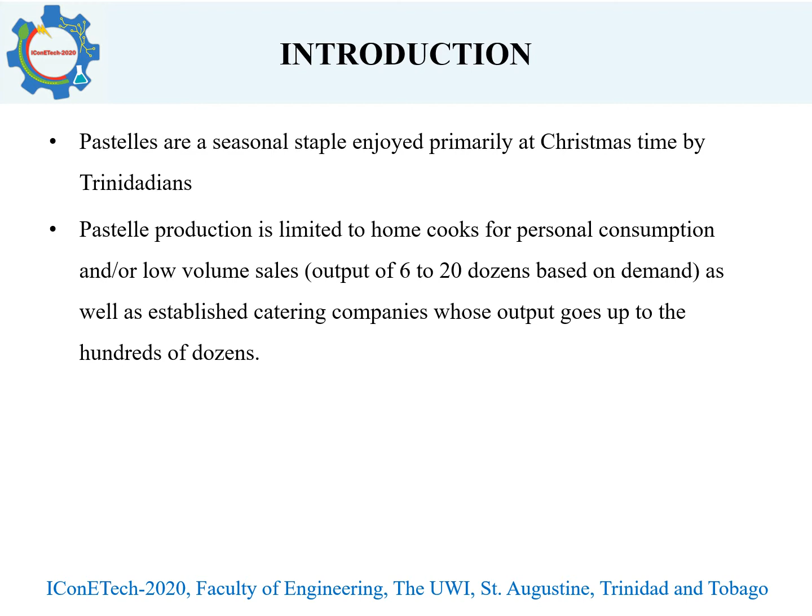Pastelles are produced either by home cooks for personal consumption or low volume sales ranging from 6 to 20 dozen, or by well established catering companies who can produce into the hundreds of dozens for large scale corporate events at Christmas time. In catering, as with all businesses, chefs are constantly looking for ways to increase their production outputs and increase profits by reducing their production time without compromising on quality of product.

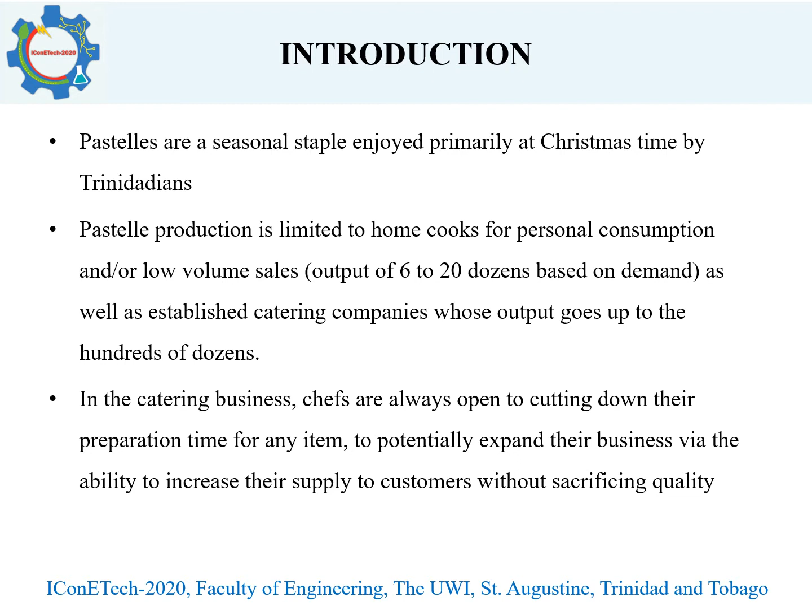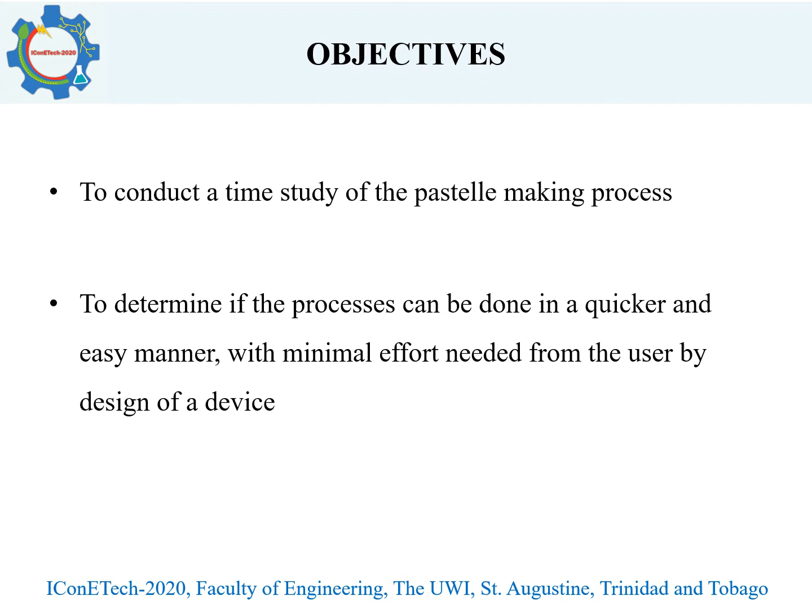Our objective was to conduct a time study of the pastelle making process with the assistance of local caterers and home cooks. For this project, we set out to determine if pastelles could be produced in a quicker and easier manner with minimal effort needed from the user by the design of a device.

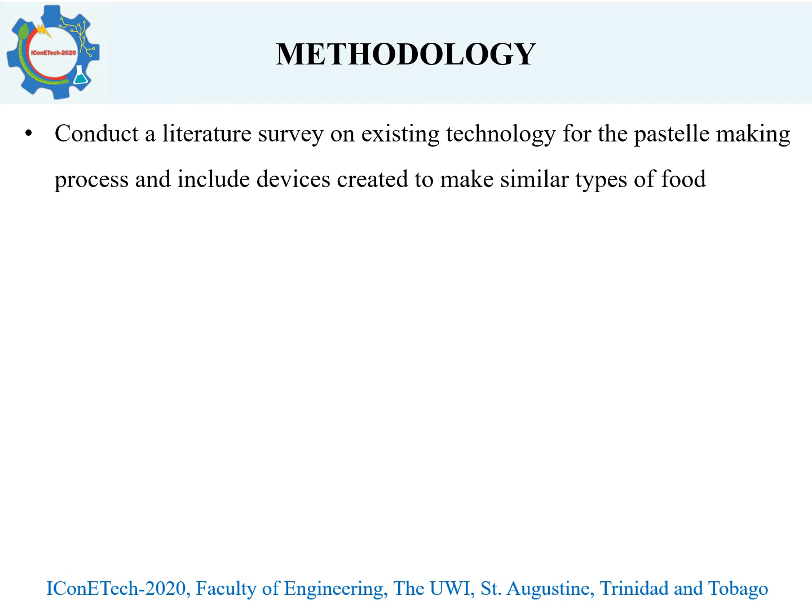We conducted a literature review on existing technologies for local pastelle production, as well as technology for similar items such as turnovers and empanadas. We conducted surveys with both producers and consumers of pastelles to determine production rates, time of year for production, as well as consumption rates.

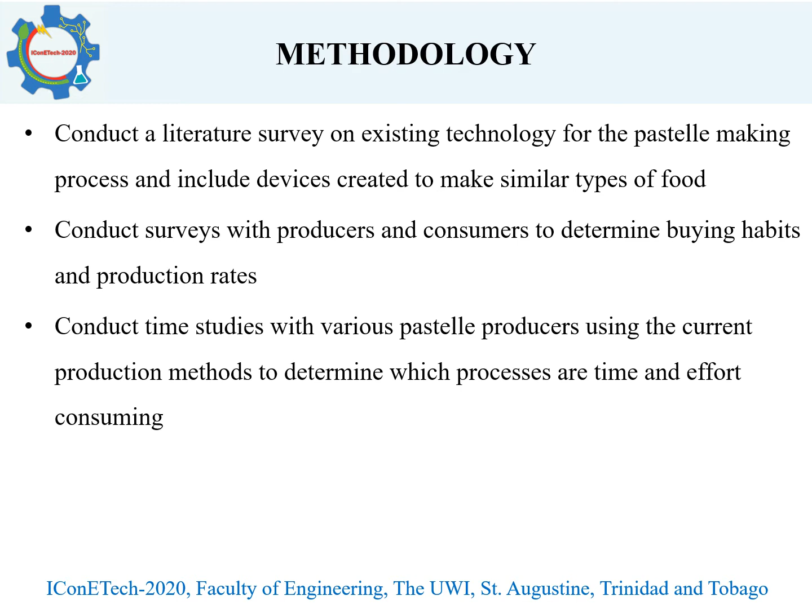We also set out to conduct time studies with local caterers and home cooks to break down the pastelle making process and determine which activities within the process were the most time consuming and required effort on the part of the producer. We used the design process to develop a device to reduce the time and effort of the pastelle making process and constructed an alpha prototype, which was then tested with the assistance of local caterers and home cooks.

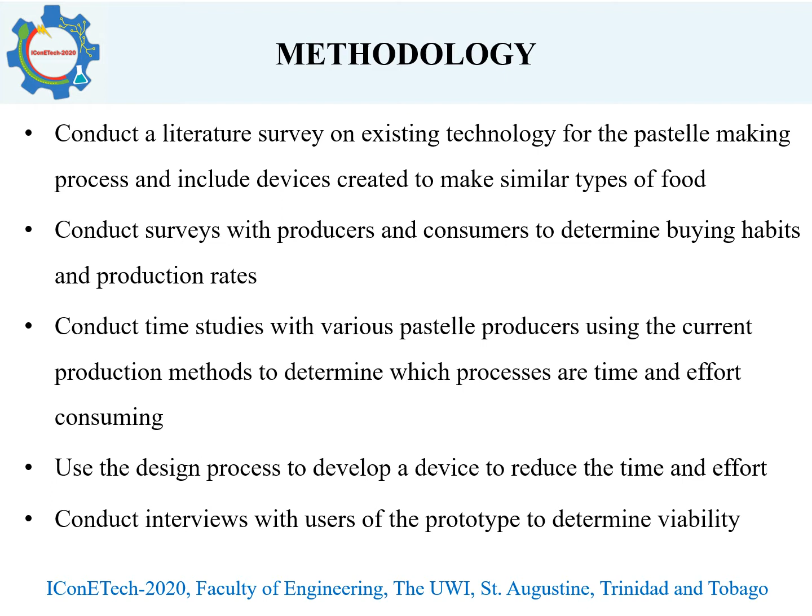We then conducted interviews with the users of the prototype to determine the viability and any room for improvement on future prototypes. For the literature review, we first looked at locally available technology for pastelle production. The manual pastelle press is the most common and widely available item for this use.

Its advantages include not requiring a power supply, being compact, portable, lightweight, and relatively cheap, as the price is around 150 TT. It can be found at many local groceries such as Massy Stores and Extra Foods. Its disadvantages, however, are that its use is very labor intensive, time consuming, and it has an ergonomically unfriendly design. It can also only be used for the pressing part of the pastelle making process and can only process one pastelle at a time.

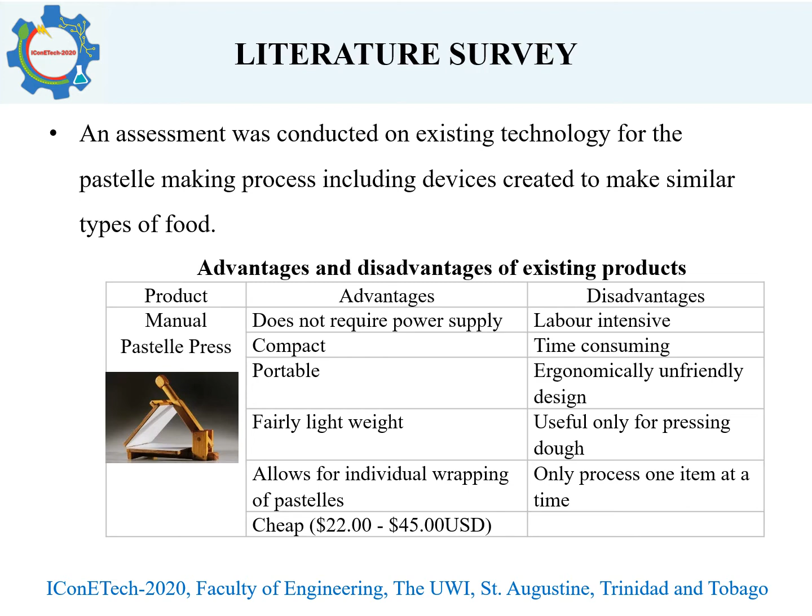The second and less common piece of technology used for local pastelle production is called the Express Pastelle Maker. Its advantages include not requiring a power supply, being compact, portable, lightweight, and being able to produce multiple pastelles simultaneously. Its disadvantages, however, include being labor intensive, and because of the item's design, pastelles are not allowed to be individually wrapped. It also does not allow for the use of a fig leaf when wrapping pastelles, which is part of the traditional assembly of pastelles.

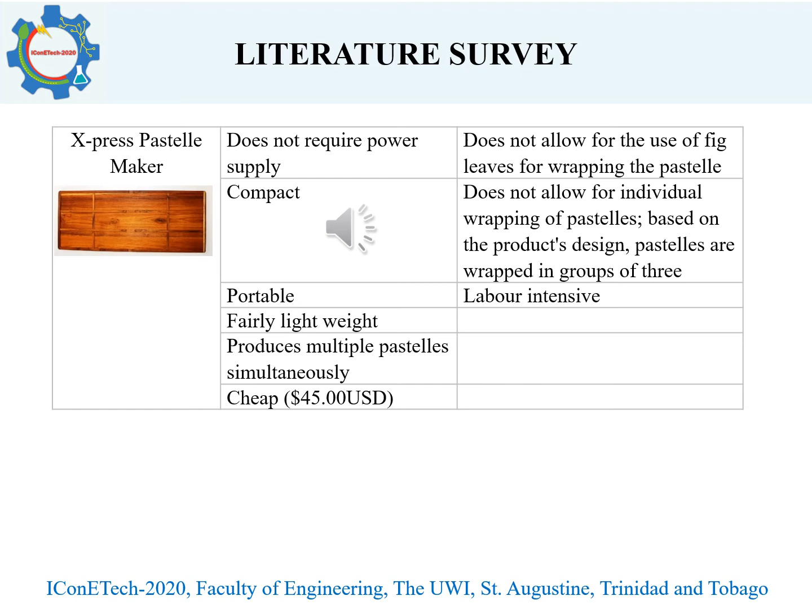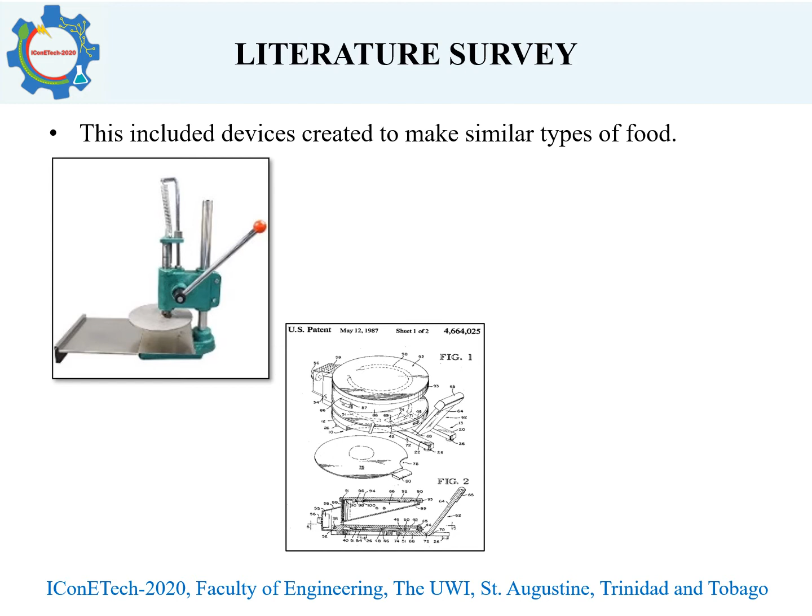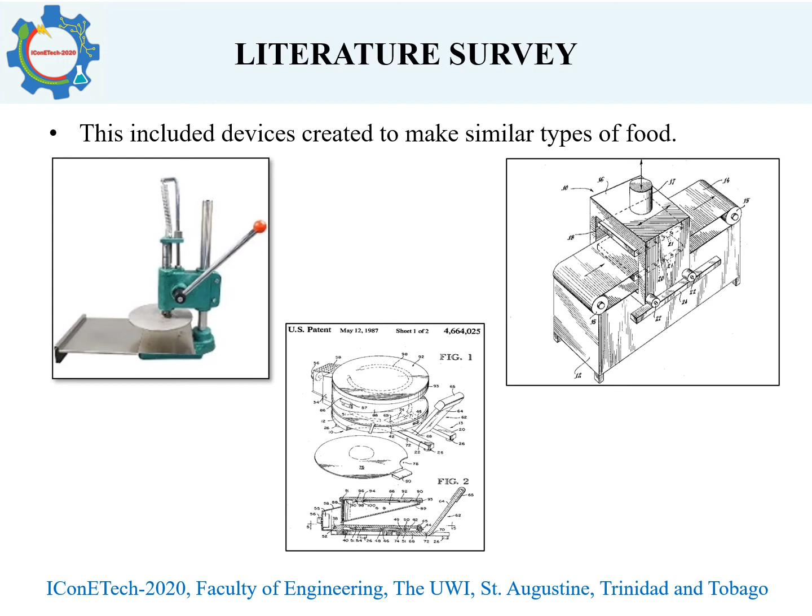We also reviewed 2 US patents. Both designs were intended for flour tortillas. The first patent is a manual press with the ability to flatten the flour dough as well as to cook the tortilla. The second patent consists of a mechanized conveyor and stamping press. It has the ability to run continuously, therefore pressing multiple balls of dough.

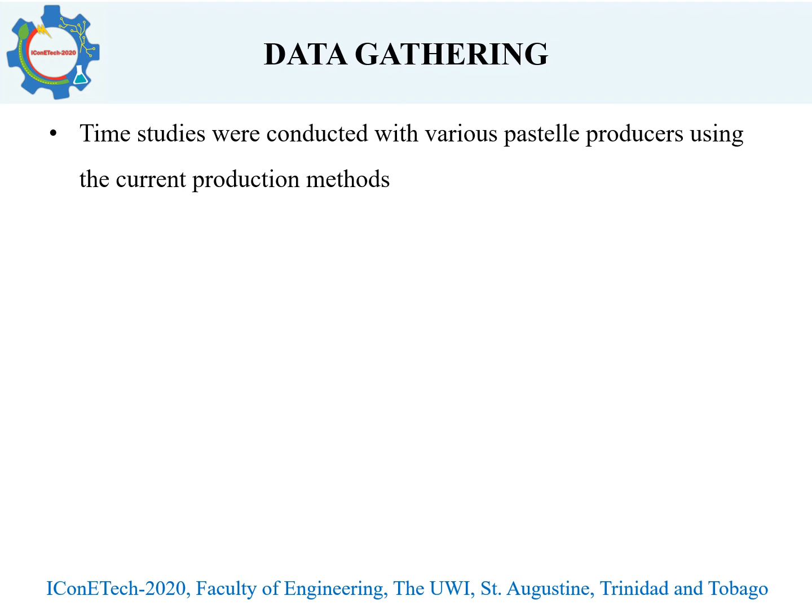Time studies were conducted with the assistance of several local caterers. The results from 2 such candidates are shown below.

Candidates were timed on each activity for a total of 6 pastelles. If we look at the average time between the 2 candidates for each activity, we see that folding took the longest, while pressing was the shortest activity.

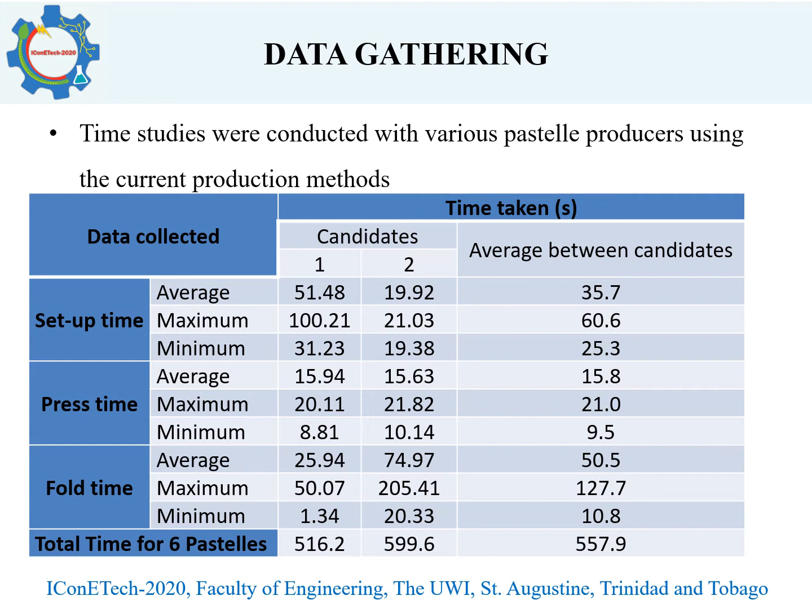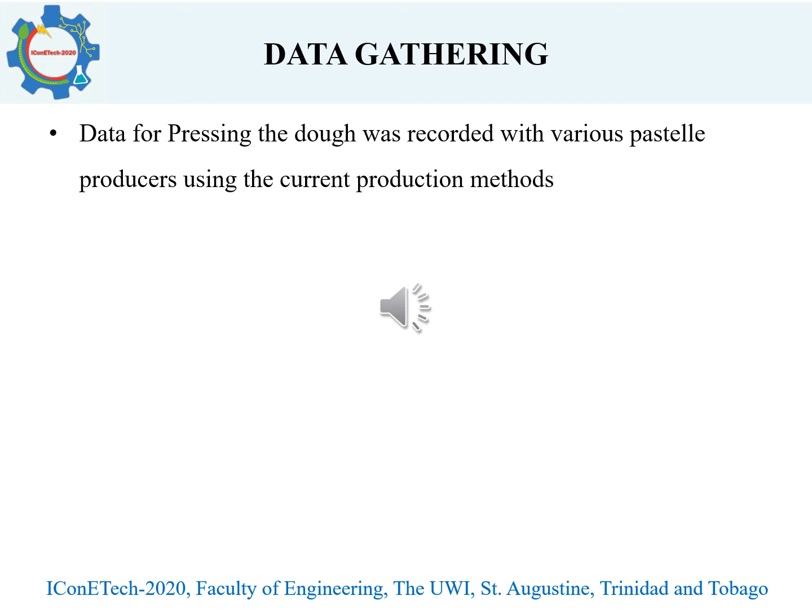Another aspect of data collection was to measure the force used to press the pastelle dough. This was carried out using a spring balance. From the measurements collected, the maximum force used to press the pastelle dough was 200 newtons.

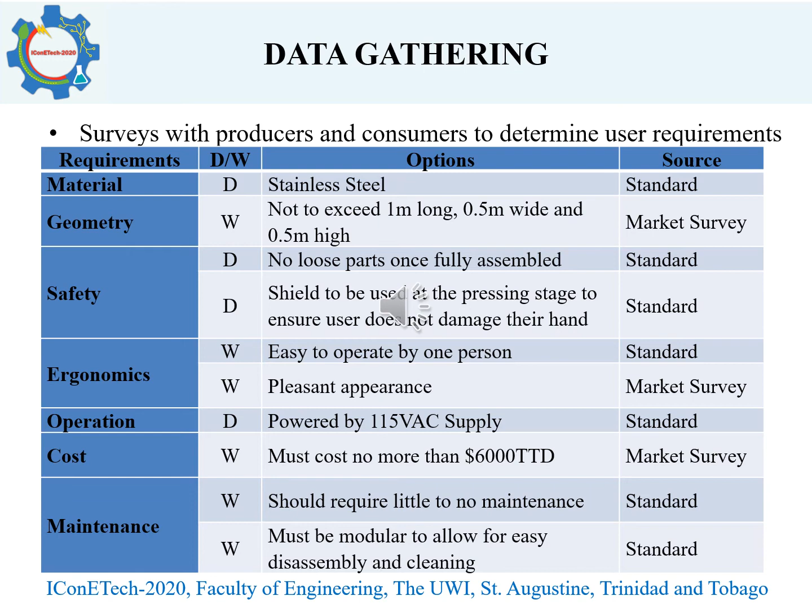Apart from the time study, candidates were also interviewed to determine their desired user requirements for the alpha prototype. Some design requirements include the item being made out of stainless steel to allow for easy cleanup, having a portable and lightweight item with the measurements of 1 meter long by 0.5 meters wide and 0.5 meters high so that it fit on the average kitchen countertop, being powered by 115 volts AC supply, not exceeding a cost of 6,000 TT dollars, and being able to be operated by 1 person.

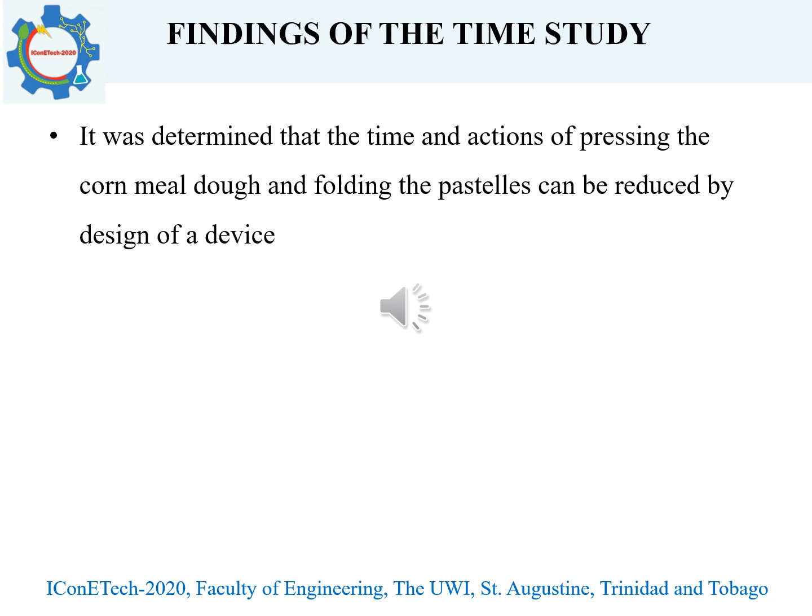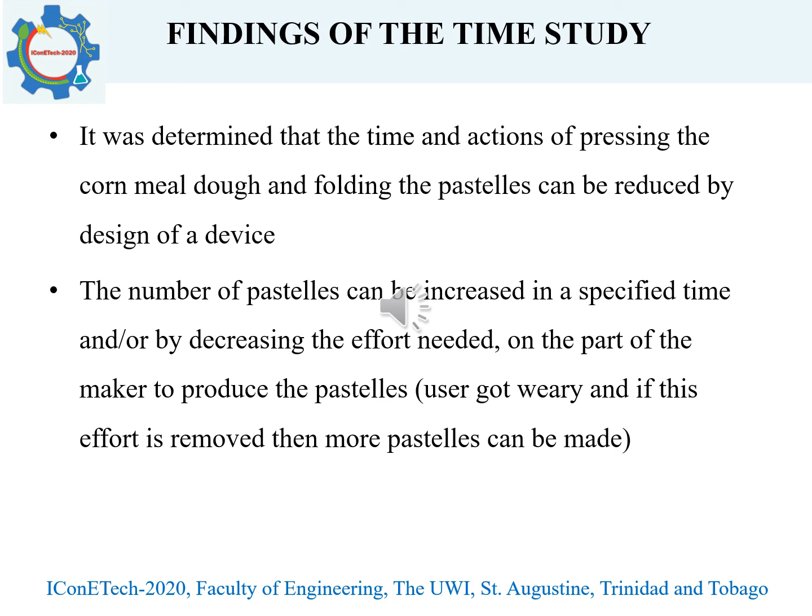From the time study results, we set out to design a device that would reduce the time and effort during the folding of the pastel itself, as well as the pressing of the cornmeal dough. The ultimate goal of this design would be to either increase the number of pastels produced within a particular period of time and/or decrease the effort needed by the user in producing the pastels.

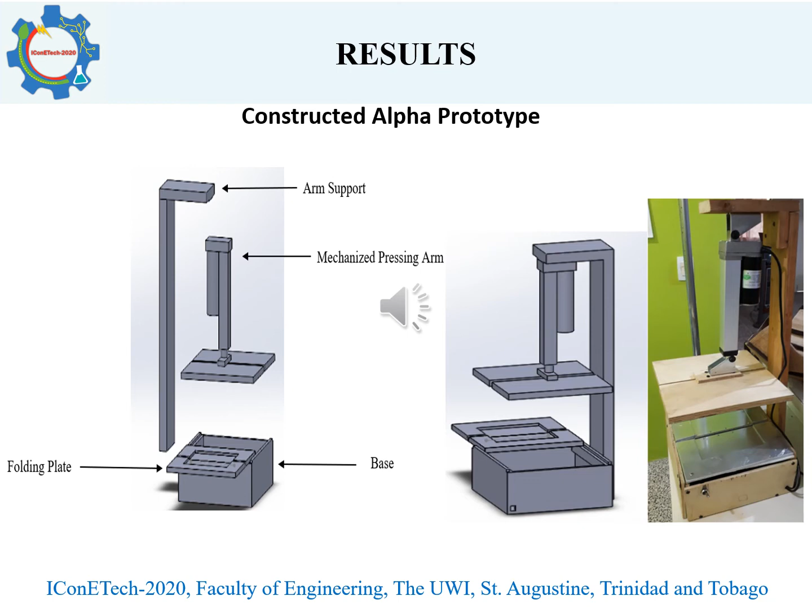Here we see the final design and constructed alpha prototype. The device consists of a base, an arm support which attaches to the base, a mechanized pressing arm which attaches to the arm support. This part is used for the pressing of the pastel dough. And finally, a folding plate which moves horizontally along the base and is there to assist with the folding of the pastel once the dough has been pressed and the meat filled.

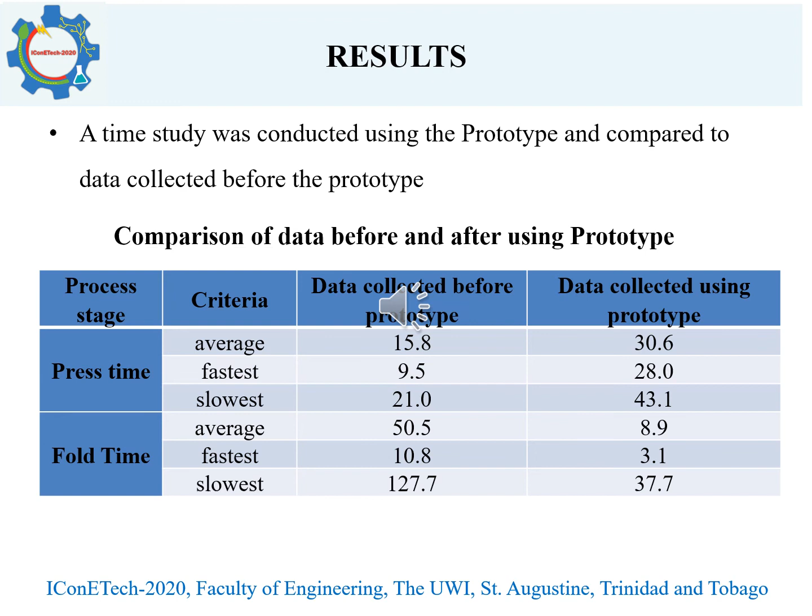Once the alpha prototype was successfully constructed, it was tested on the candidates from the manual time study. From the data collected and compared with the manual times, we see that the alpha prototype was able to standardize the press time, varying only with the user's familiarity with the device, while the fold time was able to significantly decrease. Looking at the average time taken for a user to complete 6 pastels both manually and with the use of the alpha prototype, we see that the prototype still takes slightly longer than the manual process.

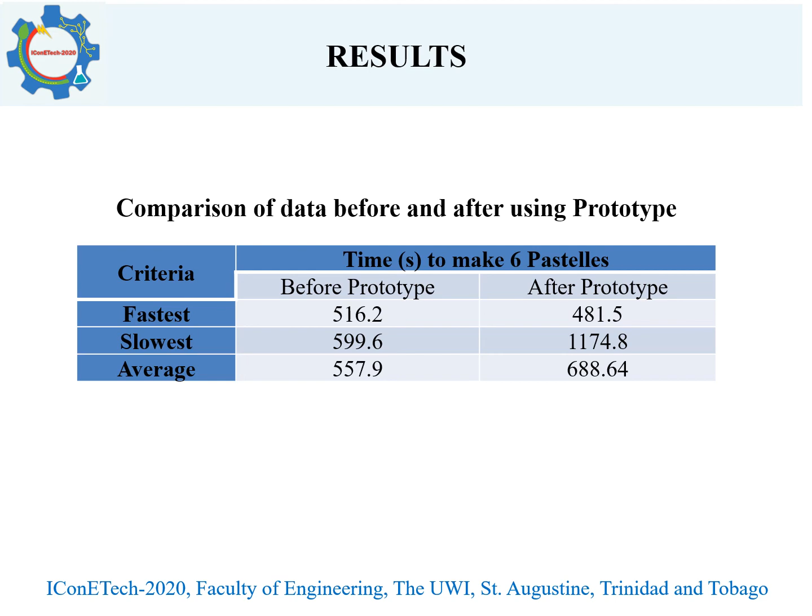Based on feedback received from the users of the alpha prototype, they enjoyed its small footprint and light weight, as well as the design of the folding plate, which allowed them to fold the pastels in a shorter period of time. Areas for improvement include the positioning of the upper press plate as it blocks the view of the folding plate when a user is standing upright directly in front of the device.

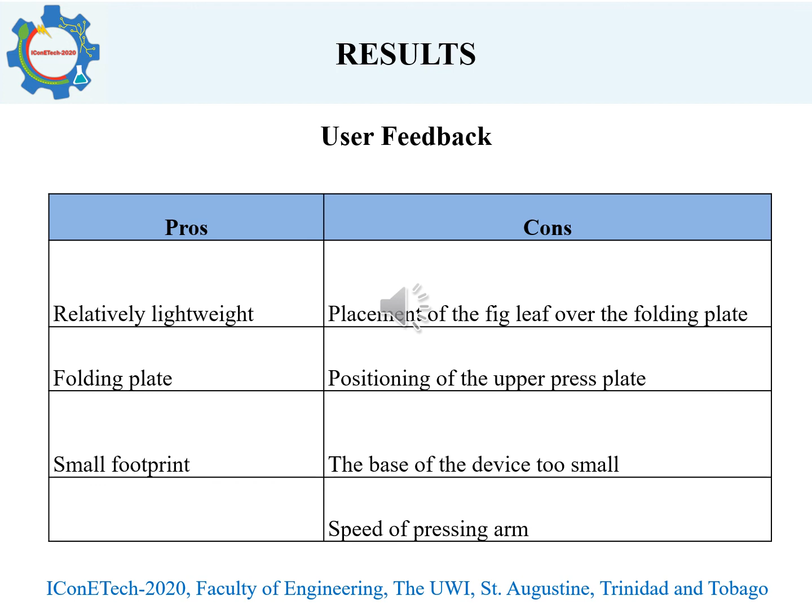The speed of the pressing arm, as having it done manually was faster for some users than using the linear actuator. Placement of the fig leaf over the folding plate did not allow for the user to see where the cutout was for the dough to be flattened and shaped. And the base of the device being too small as it did not support the folding plate during the folding part of the process.

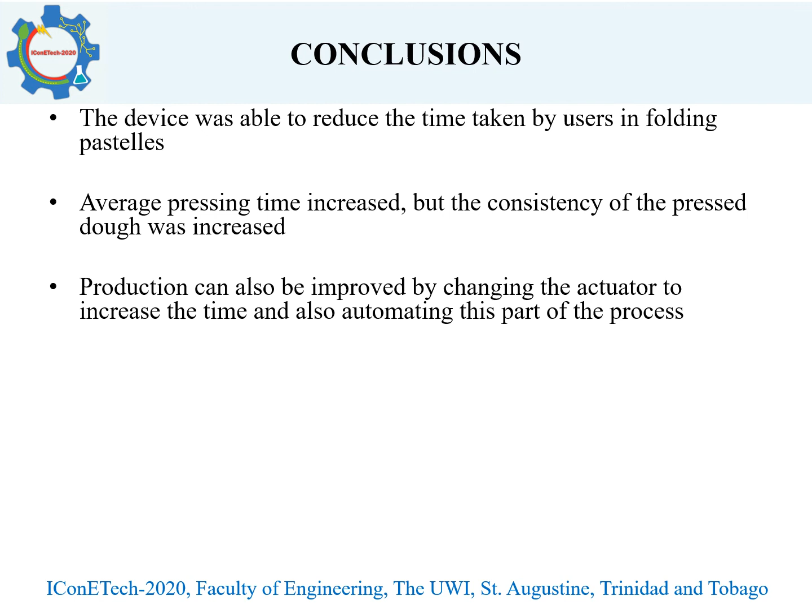Ultimately, the device was well received by the users during the testing. It was able to reduce the time taken to fold the pastels even though the pressing time increased due to the speed of the linear actuator. This of course can be adjusted in future by changing out the linear actuator for something that moves faster. By mechanizing the pressing of the pastel dough, we were able to significantly reduce the effort needed on the part of the user in flattening the pastel dough.

We also observed that with continued use of the alpha prototype, the test times for the users were decreasing. Therefore, with training and continued familiarity with the device, it's possible to further reduce the production time of the pastels using the alpha prototype.